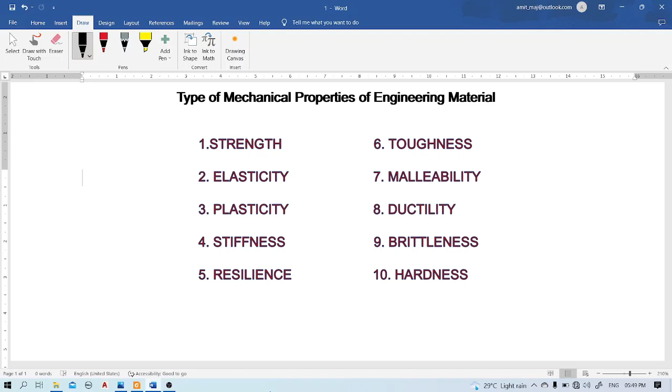First I am coming on the types of mechanical properties of the material, more specifically engineering material. Number 1, strength. Number 2, elasticity. Number 3, plasticity. Number 4, stiffness. Number 5, resilience. Number 6, toughness. Number 7, malleability. Number 8, ductility. Number 9, brittleness. And number 10, hardness. So these are the mechanical properties.

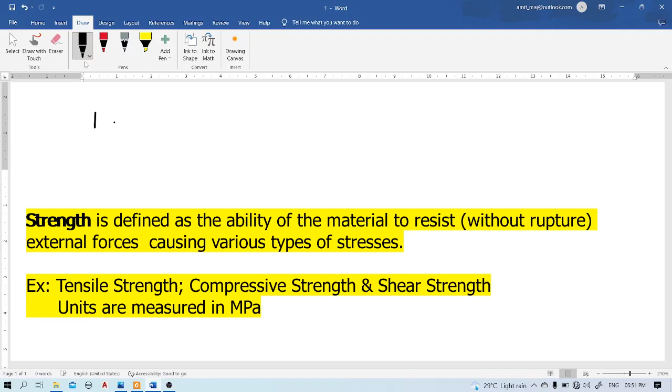We should know this also, that strength is classified based on the types of load. As we all know, there are 3 types of load. Number 1 is tensile. Suppose this is a component, a material, and the tensile force would be this type, away from each other. The direction of force would be away from each other. This is called tensile force, and the strength against this type of force is called tensile strength.

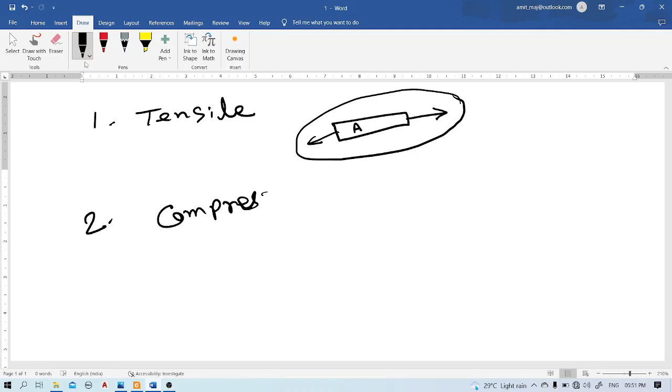Number 2, compressive. Suppose this is a component material and the type of force is this type, towards each other. The forces are acting towards each other; इसे compressive force बोलते हैं.

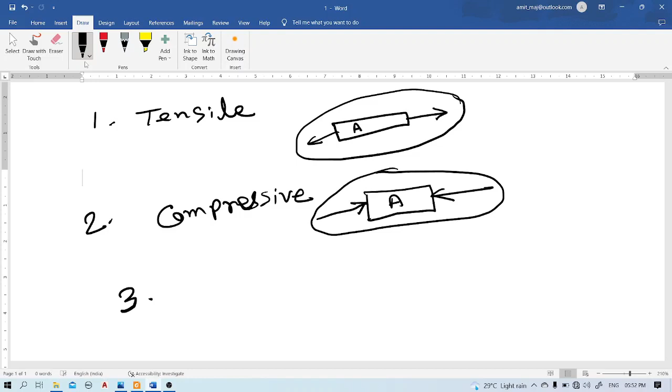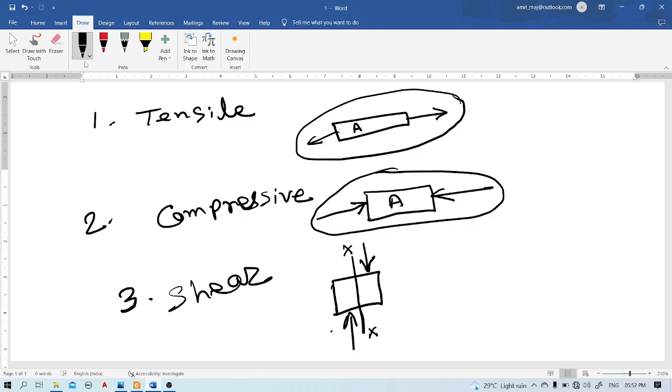Suppose this is an imaginary plane; one force is acting along this direction, another force is acting along this direction. This is an imaginary plane xx. These forces are equal and parallel to each other. This is called shear force. And based on this, three types of strength are there: tensile strength, compressive strength and shear strength.

So now I am coming to the elasticity definition. It is defined as the ability of a material to regain its original shape and size after the deformation when the external forces are removed.

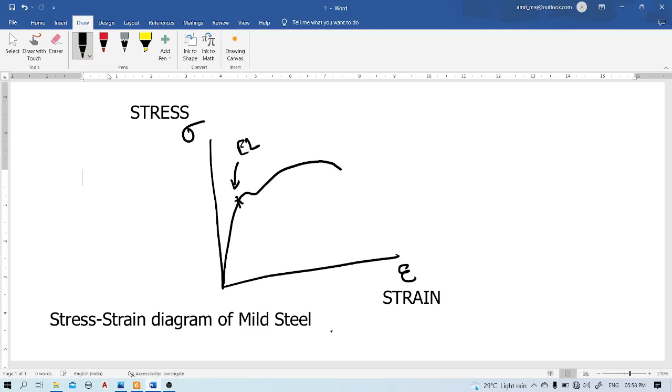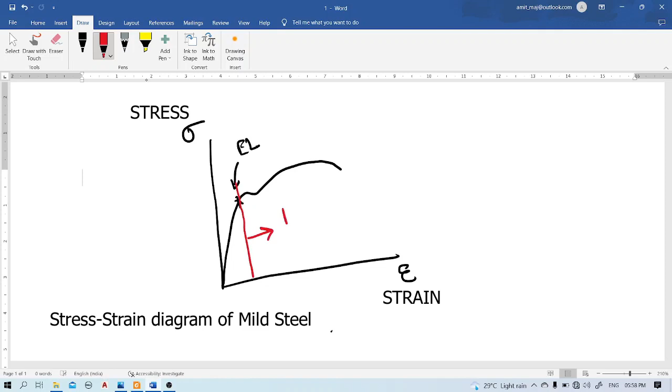This is stress and on this side strain, and suppose this is a stress strain diagram for a mild steel. Okay, now we all know that here is a very important point, there is one point and it is called elastic limit. Elastic limit. And now if I divide this diagram based on this point, on the right side of the diagram it is called plastic range, and on the left side of the diagram it is called elastic range of that particular material for which this diagram is produced. Okay, elastic range and plastic range.

Clear? Fine. Now I am moving to the next topic, that is stiffness. It is also called rigidity. Okay, I am erasing this. It is defined as the ability of a material to resist deformation under the action of an external load.

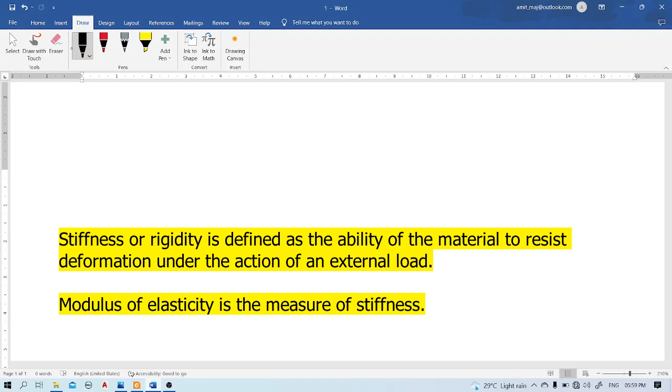Modulus of elasticity is the measure of stiffness. We all know the modulus of elasticity, Young's modulus. Okay, now for better understanding we have to move to the stress strain diagram for this particular property. Now suppose I am drawing again the stress strain diagram here.

Suppose we are comparing two materials, material A and material B. The stress-strain diagrams of the two materials are different. So from the diagram, how can I define the stiffness of these two materials, which one is greater or which one is lesser? Now suppose I am taking a certain distance here, in this direction, which means deformation. Suppose this is x1.

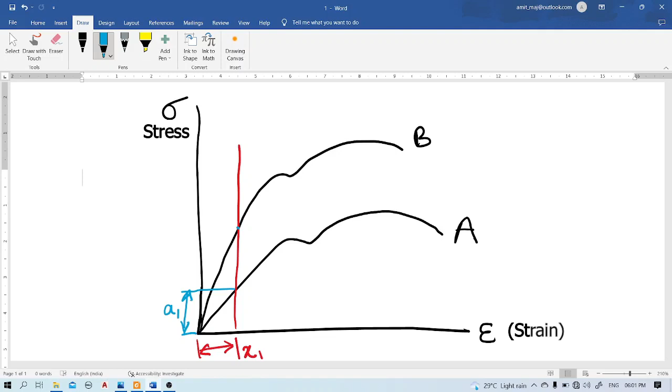And if I draw a line from this point, now try to understand one thing. For material A, to get the deformation amount of x1, we have to apply this much stress, a1. And to get the same deformation in case of material B, we have to apply this much stress, a2. From this diagram anybody can understand that a2 is much greater than a1.

So what does it mean actually? To create the same amount of deformation, we have to apply a greater amount of stress in case of material B. So in this way we can say the stiffness of material B is greater than the stiffness of material A.

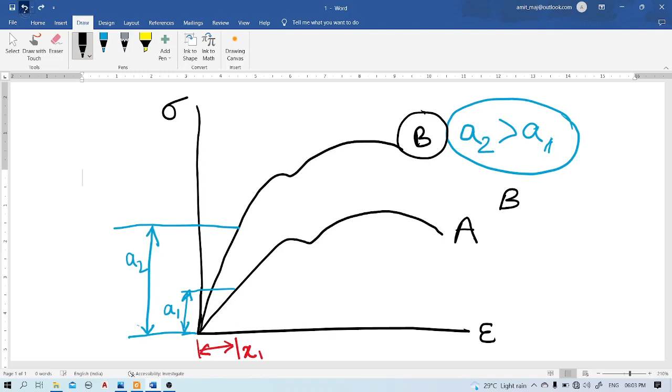Another thing you can also see from this diagram: for the two diagrams A and B, the slope of this line, suppose this is theta 2, and the slope of this line, suppose this is theta 1. Which one is greater? Theta 2 is greater than theta 1. That means the stiffness of material B is greater than the stiffness of A. Okay?

And we also know that the modulus of elasticity can be defined by the slope of the stress-strain diagram in this linear range. So in this way you can understand the stiffness of the material. Next, resilience. Okay, I am removing this.

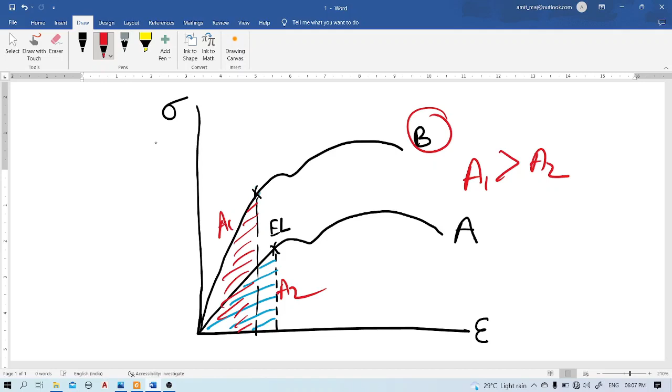Without allowing permanent deformation, we want maximum deflection from a spring. So this resilience property is checked for the spring material. It is a very important property.

Okay friends, up to this, I hope you all understand this.